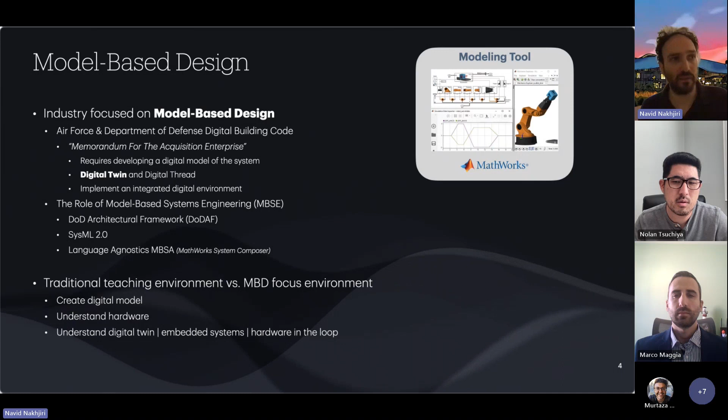They can run simulations through this platform, but now we are adding a lot of hardware that goes with them. Quanser is one of the partners that we have a lot of equipment with, and most of the examples you see today are basically the collaborations we have between Quanser and MathWorks in terms of teaching model-based design and bringing hardware in the loop for our students to learn better.

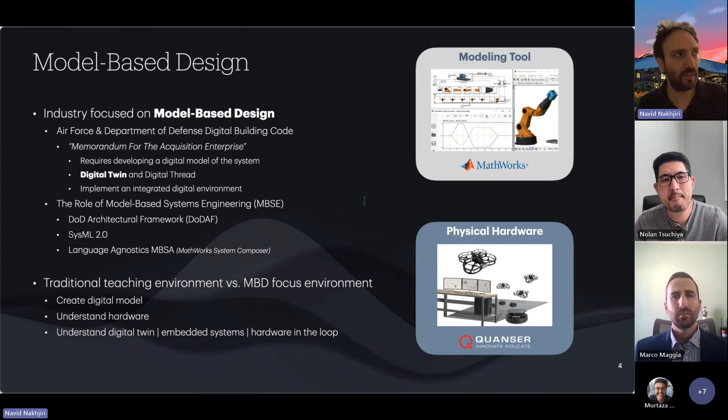So we are going to have 4 case studies for today. Each one is basically prepared by one of my colleagues.

We're going to talk about the feedback control lab and the mechanical control lab. These are the two we already have established at Cal Poly Pomona, and students are using this, and it has been a great experience for us. But then the other two, the astronautics lab and smart manufacturing lab, are what we are doing in partnership with Quanser and MathWorks in order to develop the future of laboratories and smart, innovative projects and research that we can do with these methodologies.

So, feedback control lab, kind of similar to a lot of other curriculums. We are teaching control, but it's based on the idea of learn by doing. We want the student to learn exactly what a control system is by applying that to hardware. So they learn through the software and modeling, through Simulink, and then they apply that on the hardware and start experimenting with all of these relationships.

We're going to focus on the mechanical control lab, on the teacher-scholar model, which we are using as kind of a bridge between teaching and research, and the hardware and modeling we have there is going to support that.

On the astronautics lab, we are going to talk about digital twins and the future of digital twins, and how it can make us able to do virtual testing and virtual experimentation. That's one of the cores we are going to share. And then we're going to talk about the smart manufacturing lab.

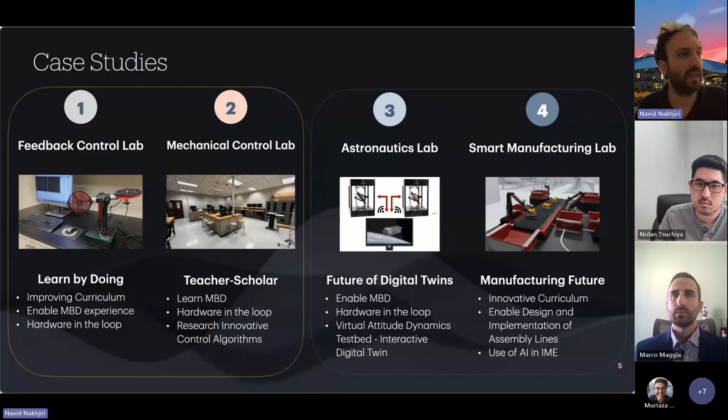We are seeing how we can create an industry-level manufacturing modeling with hardware and software, and how we can in the future use some of the technology and algorithms that comes in machine learning and AI in order to optimize these kinds of manufacturing processes at Cal Poly Pomona for students to learn as well.

I'm going to start going through the first case study. This is the case study that my colleague Ray Hodson has created. Ray is a practicing aerospace engineer. He has been working in the aerospace industry since 1985, and his main areas are in aircraft performance, flight controls, and guidance navigation. Over the last 15 years, he has been very active in designing model-based systems engineering models and teaching these to industry, and also at Cal Poly Pomona as an adjunct faculty.

He's now serving a lot of aerospace companies as a consultant. So what we want to share about this experience is how we improved our feedback control lab in order to follow this exact model of learn-by-doing and bring these techniques into our classroom. So this is just an overview.

And then how they can apply that on hardware, that in this case is going to be Quanser hardware, where we show them how those control algorithms are going to be applied to hardware and how there is a connection between the design that they have and what they see in the experiments that they do on the hardware. They can compare the real-time response of a system this way.

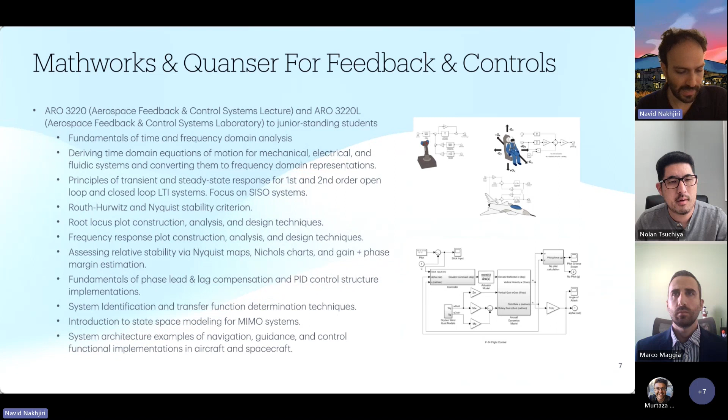So this slide just gives you a list of what we cover in a typical control class. This is at the junior level for our aerospace engineering program. So what we did is we actually started thinking about what the industry needs, and this is coming from the industry itself. As I said in the industry advisory board, they tell us that industry likes to see MATLAB and Simulink as the leading control system design analysis tool, and a lot of aerospace engineering companies are using this as their baseline for a lot of design.

So we had to bring this into a classroom, and that's the core of the controls class that we teach at Cal Poly Pomona. Now they want the graduates to be able to work on control systems, not only understand those concepts, but be able to actually design a control system. And this is where Simulink and MATLAB is going to be very helpful for us.

They need to understand something that we refer to as closed-loop learning, which means that they can basically bring everything to a final design and then do an experimentation, understanding the modeling, understanding how they can check their work, understanding how they can validate these models. We want them to be able to explore more complex problems using these tools, and that's one of the benefits of model-based design—it allows you to actually add to the complexity of the system and still get a lot of interesting results out of it.

We want to have also a student-to-student learning experience, because when we are doing this in a classroom and lab environment, we actually encourage the students to work together to fix a model, to troubleshoot a model, and then even work with each other to learn the way that they are modeling.

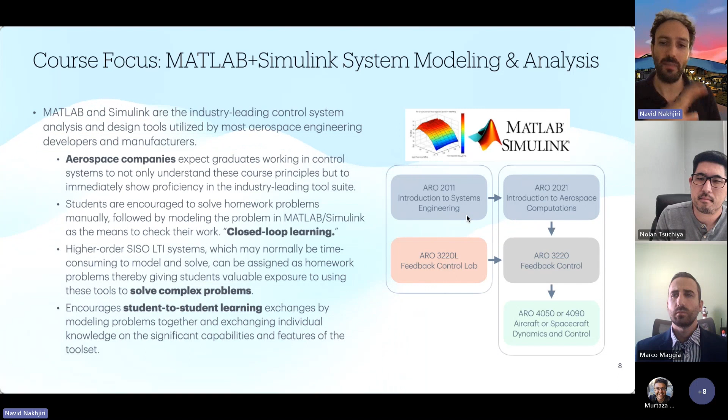What you see here is the result of an industry-driven curriculum design, because they want students to get all of this knowledge, expertise, and skills, not just in one area or one theory. They want a comprehensive understanding of how the system is designed in general, and this is our way of bringing that into our classrooms.

With the new addition, we recently had the opportunity to upgrade our control lab, and we started looking into the aero devices from Quanser, which is what we have set up right now. We have multiple of these stations so students not only design the experiment in Simulink and run it to get numerical data, but they also have to apply that on the hardware.

Hardware-in-loop integration of the Quanser devices is very important for our students now, because they see how industry actually does this. This is the standard: you design a model, then bring in the hardware, do testing and verification and validation for the entire system before applying it to a much larger system. We give students the ability to test their control system design on these platforms, and they also learn how to compare experimental data with numerical data.

As I mentioned before, they learn how to do real-world troubleshooting when they see a problem in the hardware, and they can go back into the model and try to fix it. Right now there are 6 experiments at the core of that feedback control systems course, where students learn how to design models in Simulink, bring them onto the hardware, and test them. It's a typical feedback control system, but we make it an engaging and interactive experience for students going through the software and hardware.

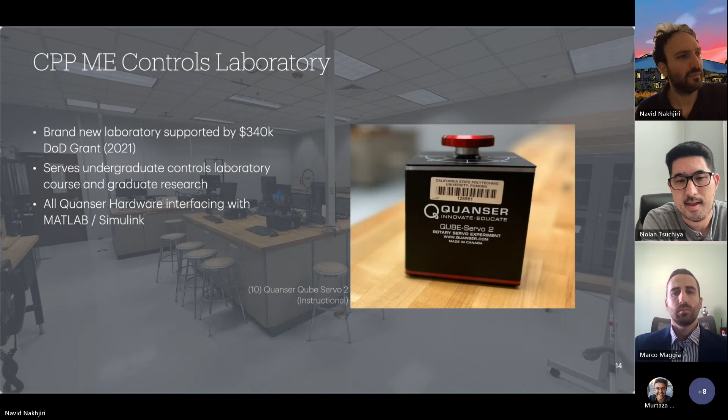The things we have outfitted this lab with are 10 of these Quanser Qubes, and I'll speak in detail about how we use this particular hardware in just a minute. We've also got 6 of these Qbots, which are open source, general robotic platforms, which is really nice.

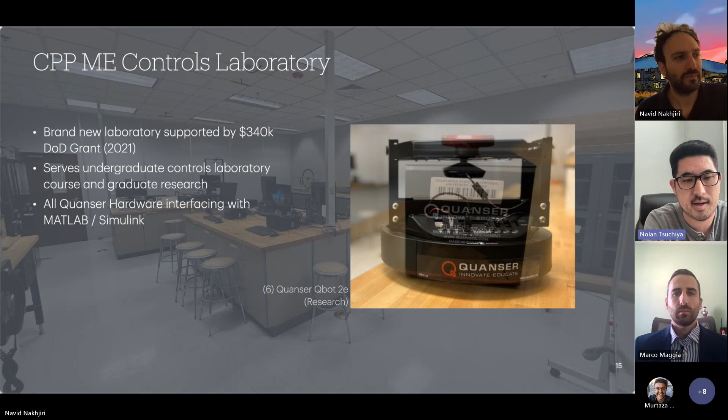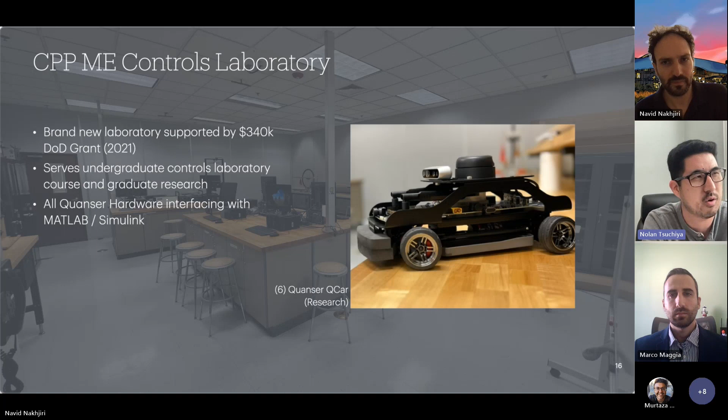And then we've also got 6 of these Quanser QCars. Now these are really powerful research tools, and I'll speak in more detail about these in just a minute. The grant we received covered the cost for all 10 of the cubes, as well as 6 of the Q bots and 6 of the Q cars, along with a very powerful PC workstation and all of the software licenses needed to run the specific hardware on all of the 8 or so workstations.

Our lab is dual purpose, like most of the labs at CPP. This instructional laboratory is essentially for our classical controls course. Not every mechanical engineering department in the country has a required controls course, but we do. Developing this lab was important because prior to 2020 we didn't really have a set controls lab. We had some lab space, but a lot of the projects meant to reinforce the lecture material were just project-based, where the goal was for students to build something and do feedback control with whatever peripherals they had.

Typically that would end up being some Arduino projects, where not only are students not focused on the core academic concepts, they tend to get bogged down in the details of just learning how to write code in Arduino and the mechanical aspects of building. So there was very inconsistent laboratory experience across students within a section, as well as across all the other sections of the course.

Being able to transition over to the Quanser Qube Servo 2 platform has given us this fantastic advantage where all of our students are now getting a consistent experience within the section as well as across all of the sections.

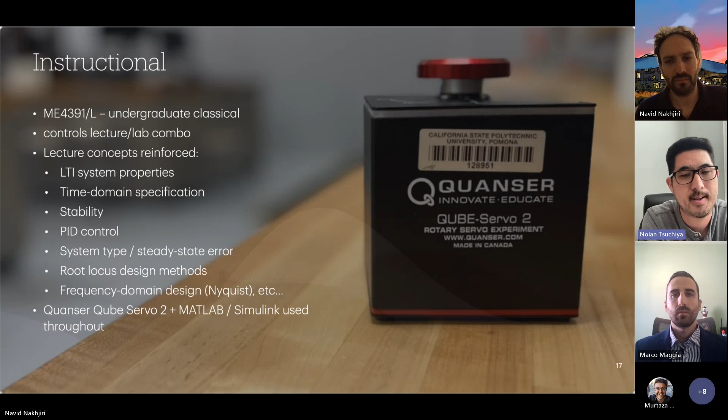Next, Navid. And then we've got other hardware. We've got some of these Qbots, which are essentially Roombas. If you look at the foundation of it, it's a Roomba, like one of those autonomous vacuums that rolls around your house and cleans the floor, but kind of on steroids. This is sort of an open architecture—it's an autonomous ground vehicle, is what it is.

That's great. It's really nice because this particular platform kind of bridges the gap from undergraduate instruction to postgraduate research. It's just this nice open platform, and some of the concepts it can reinforce, like line following and a little bit of computer vision, are appropriate for maybe a senior level capstone project or a first year graduate course.

What's nice about these Qbots is that Quanser offers a lot of documentation, even some curriculum, so you can get some type of curriculum right out of the box with these platforms. These are really nice if you want to do any sort of coordinated path planning or just basic line following to get a sense for what robotics is about.

And then next, Navid. And then the last thing I wanted to talk about are these guys—these are really cool, there's no other way to put it. They're called the Quanser QCar. It's like a 10th scale RC car that you could buy at a hobby store, but beefed up with thousands of dollars of modern sensors that you'd find on an actual autonomous vehicle. This is like our autonomous vehicle research platform.

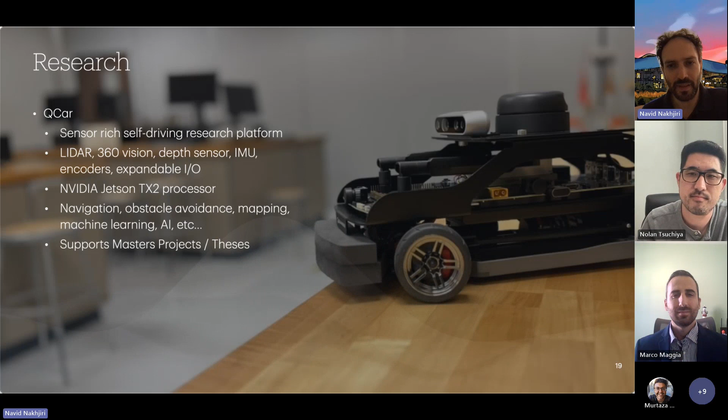Thank you, Nolan. And I think the next case study that I want to share with you is about the astronautics lab. So my colleague, Dr. Marco Maggia, is going to talk a little bit. Marco, go ahead and introduce yourself.

Hello, everyone. My name is Marco Maggia. I am an assistant professor of aerospace engineering at Cal Poly Pomona. This is my second year. And today I want to talk about the astronautics lab and the vision that we have for this lab for the future.

First of all, my areas of expertise are small sat dynamics and attitude control, orbital mechanics, and also vibrational control. I do active research in station keeping of small sats around libration points.

So this is the vision that we have for the future of the astronautics lab, and especially one part of it, which is called the small sat lab: to introduce a digital twin accompanied with hardware in the loop to boost our research capabilities and also teaching capabilities, in order to provide a highly skilled workforce for the industry and make the lab more accessible.

This is the current small sat lab. As I said, the small sat lab is just one part of the astronautics lab; the other is the space lab. The small sat lab is not just small sat, it's very small itself. It's only 15 by 11 feet, and it can only comfortably host 3 to 4 people at a time. Already the lab is pretty crowded.

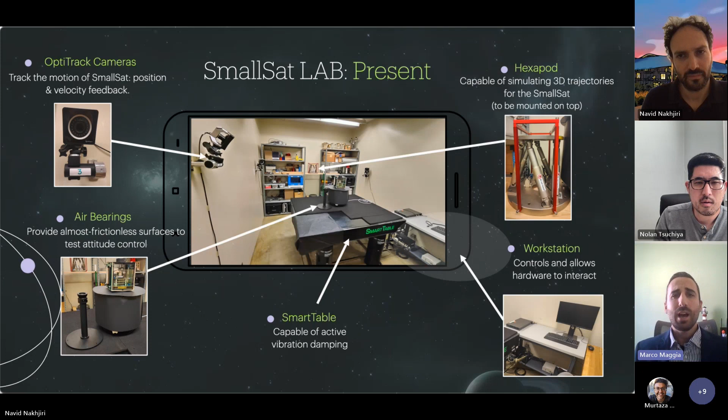So this is the present of the small sat lab. What do we have in store for the future? Next slide, please. The introduction of a digital twin. I will explain more of what a digital twin is and how we will be using that in the context of dynamics and controls research.

Of course, in order to do that, we need new equipment. So here I'm talking about the future. Dr. Nakhjiri and I wrote a proposal seeking money from the Department of Defense, the same grant that Dr. Tsuchiya won in 2021. So hopefully, if awarded in 2024, we'll be able to build a new platform.

And the two big consequences will be to prepare our students to enter the industry with new capabilities and skills in digital twins, and to make the lab more accessible and foster collaboration with other institutions.

All right, so what is a digital twin? A digital twin, you have to think about it as a virtual replica of a real system. In our case, the real system is a small satellite. So the digital twin models the real satellite, but in a simulated environment, so you can replicate the behavior, functionalities, and responses of the actual hardware through a simulation.

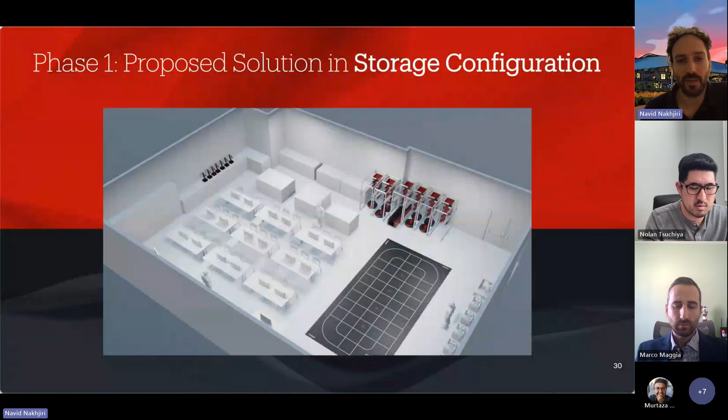The project they started is in multiple phases. They're in the beginning phase one, looking into something called the storage configuration solution. This is state-of-the-art technology components that go into this lab. We're designing the entire lab around the idea of how we can improve the learning experience for students and bring the industry demand into teaching the courses and teaching the technologies to our future engineers.

What you see over here is an overall vision for this lab, but there are a few elements of this lab we're highlighting over here as kind of showing you the plan.

This is looking into different elements of the manufacturing line. You see that they're looking into retrieval systems, the robots that can go and bring parts and also sort parts into different shelving. These are different elements you see over here. We have the Qbot platforms that are basically designed and being programmed for doing especially this task.

On the other picture, you see the Q arms. These are helpful for doing the assembly and also for sorting and retrieval, managing different elements that go on the conveyor belt. Students can program these because they're open to any sort of algorithms they want to implement. So students can experiment with different types of optimizations in their processes, and these platforms can create something very similar to what students are going to see on the actual factory line and in industry.

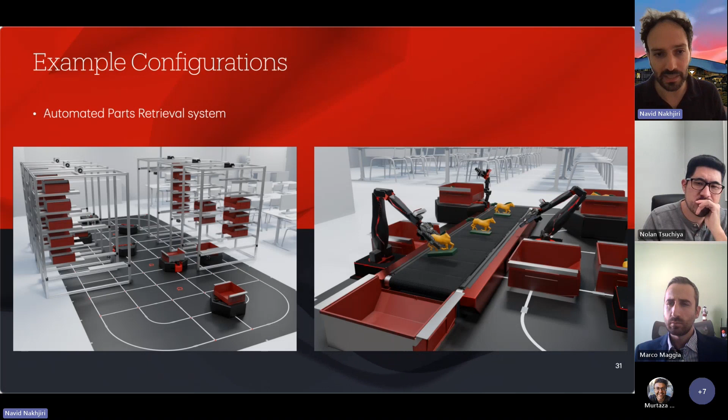This is part of what the IME department is very interested to explore. This is the assembly lines. Again, you can use the same type of equipment for a different purpose, for a different course. When students are looking into how they can optimize assembly line, these platforms can work on different elements.

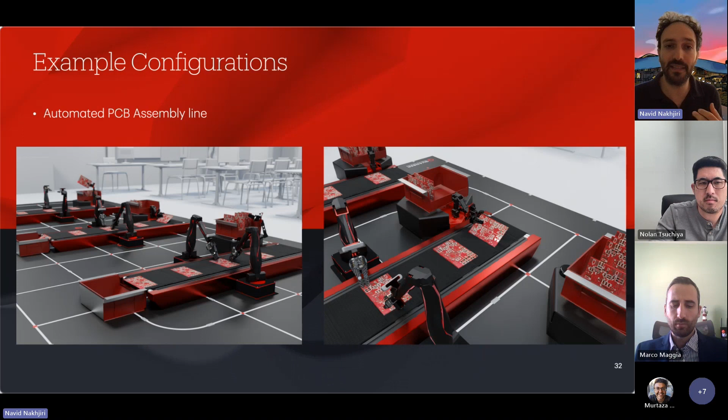And finally, you look at the entire platform together. You can do assembly, retrieval, sorting. Some of these robots can bring the elements or pieces to the assembly line. The assembly line can then pass it to the sorting, and the sorting can pass it to the storing. You can see all of this within the same equipment that they're bringing into this lab.

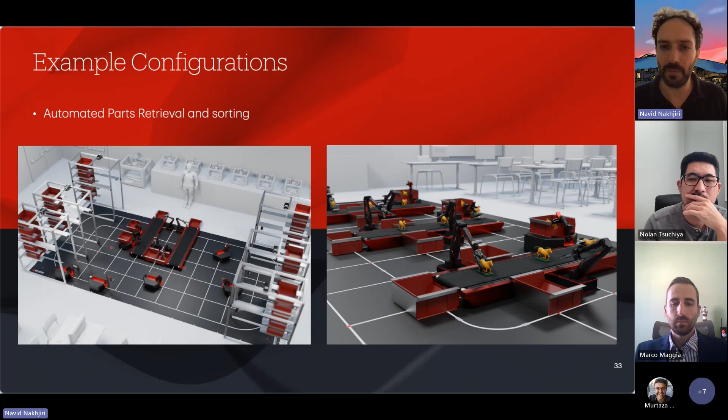One of the main reasons they're investing in this is not just to do practical or typical algorithms used in industry, but also to research how machine learning and artificial intelligence can help design better manufacturing lines and assembly lines. Because of the type of platforms they're getting into this lab, they're capable of doing this in an open architecture format.

This is just the last slide for the IME department, showing different courses. As you can see, these are the courses we have at the undergraduate level, and we're looking at how this equipment and these labs are going to help these particular courses, and what configurations they're going to use between all those different elements we saw in the pictures. As you can see, even just one lab can be integrated into a lot of different courses.

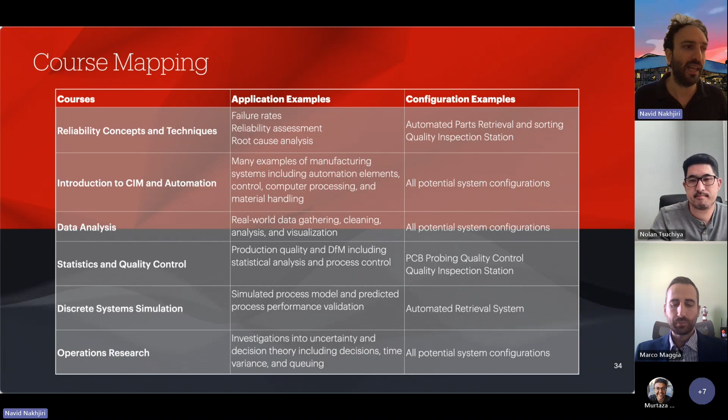So this is, again, another vision that came out of a lot of industry-driven conversations, what the industry wants the student to know when they come out of this program, understanding not just the theory of what the manufacturing process is, but actually seeing the manufacturing line and assembly line, working on algorithms and optimizations. That's well fitted within the scope of what we do at Cal Poly Pomona.

I'm going to go to the closing slide and give you an overall view of what we talked about. So, Cal Poly Pomona's philosophy of learn by doing motivates the teacher-scholar model for doing research and teaching at the same time. But one of the main elements that's always important between that philosophy, the goal, the vision, and what we apply in classes, is that it always comes from the industry inputs we have.

And we try to take them very seriously. We change our curriculum on very frequent cycles. Every time we have a meeting with industry and there's a new project, we think about how we can improve what we do in the classes for the students.

But in today's discussion, we also talked about three core elements that come out of those industry inputs: model-based design and digital twin, which we're trying to use to create a better workforce for industry aligned with the current trend in digital twins and digital engineering.

We talked about the virtual labs, how we can use some of these platforms to run algorithms, even run algorithms with hardware in the loop, but virtually, allowing more access and basically supporting student success in teaching and research at Cal Poly Pomona.

And we're also talking about smart labs that give us the ability to do innovative research. With just a few pieces of equipment, we can allow students to be creative as long as the platforms are open. We can explore new algorithms, look into machine learning and AI, and prepare students for the future of industry.